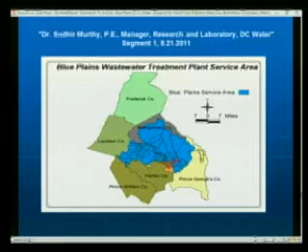Yeah, and I was going to say, this is some of the largest counties in both Virginia and Maryland, so these are a huge population base, and of course it's not as big as maybe some of the mega cities that we'd have overseas, but as far as the area that you're serving, it really is a huge area, and this gives us another idea, Sudhir, of just how expansive this entire area is.

Yeah. So, one of the longer sewer pipes is, I think, over 50 miles long. So that gives you a sense of how long it takes for that water to get to the Blue Plains plant. Well, also, I think there's like 1,800 miles or something like that of piping that goes into this whole thing. I mean, these numbers are just astronomical. Yeah. What are we looking at here?

But one of the things, when I was out on my tour with you, you were talking about how one of the features of being the most advanced plant on the globe is that you have to protect both the rivers, the Chesapeake Bay, and the Atlantic Ocean, which is a huge task and very expensive. Tell us about the separation that you're doing and why it's so complex in your factory.

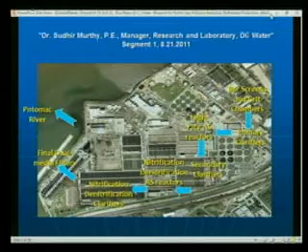Yeah, and I understand that as far as other plants, I call them factories around the globe, really is that you're either taking out the nitrogen, you're taking out the phosphorus, and/or a combination with the carbon. But this is really the only plant as far as the world is concerned where you're taking out all three simultaneously. To very low levels. At very low levels as it's going into the water.

And of course, you have this tributary. And many of us kind of forget, yes, it's going into the Potomac, it goes into Chesapeake Bay, we need to improve those. But we don't realize the impact that we're having from this region on the entire globe, because once it gets into the Atlantic Ocean, who knows, through the tides and through the water flows where all that water is actually going to end up. That's right. And it's everywhere out there.

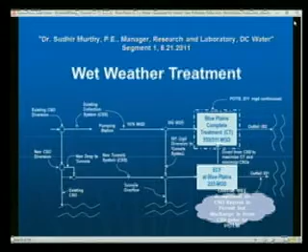So looking at this treatment here, what are some of the processes that we're looking at, in a very simplified fashion? So the slide that you see out there is really what we're trying to do coming up now. We have what we call this wet weather treatment plan, where we hope to bring all these combined sewer flows to the Blue Plains plant rather than it going out into the Anacostia River or the Potomac River without being treated. And so we are designing these projects that will build tunnels underneath Washington, D.C., and then bring that flow to Blue Plains plant where it will receive what we call enhanced treatment.

Now, understand this part of this is about $2.3 billion. Now, that's with a B. That's a lot of money. And everything that you're doing in this whole, and I'm going to go back to this slide here, what we're talking about is really almost $4 billion worth of investment. As I understand, this plant's now worth somewhere between $2 and $3 billion itself as it sits. So we're actually having about a $7 billion facility. Infrastructure. That's a huge investment by the public. And this is where we're going right now.

Now, I understand it's about 10 million U.S. in savings as far as energy that you're not going to have to be bringing in from the utilities, so you're becoming more self-sufficient. And also that the overall cost savings is about $28 million. Is that in a month or is that in a year? The total savings as far as everything. So what we expect is... we have only a few seconds. We have an energy program, and we expect to have several million dollars of savings per year just from energy.

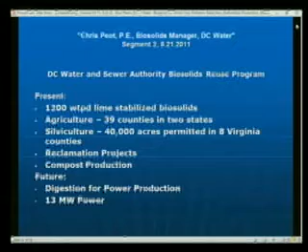So what we're doing actually, Chris, in all this, we're looking at, again, this nitrogen, phosphorus, and carbon that we're actually extracting out of all this because those are natural elements. Then we're putting it out on the soil. And the whole thing is that we're not just trying to stop what's happening at this time. We're actually trying to improve the environment. So that's air, water, and land. All 3 of those we're trying to improve through this very expensive process.

It is. I actually refer to Blue Plains as a nutrient recovery facility. We're recovering water, of course, nutrients, carbon, and energy. And all of that right now is going out to the fields, the farms, and we don't extract much value from that. We're glad that the farmers are using it. They are avoiding the use of manufactured fertilizer, which takes a lot of energy to make, of course. And also we're importing the petrochemical inputs in order to be able to produce this chemical fertilizer.

So being able to take all this human waste and then put this out onto the farms in a sterilized format, so we're not putting pathogens into the soil, is a very good thing for the environment and for humankind in general. It is, and our future holds even more technological advances. We've actually broken ground on a project to build digesters with a very innovative pre-digestion process to convert half of the organic matter that's in the biosolids to methane. And then we're going to burn it in a very clean burning turbine to create power.

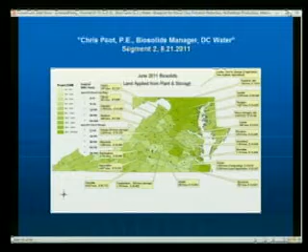Sure. This is our current program. This is, I think, June of 2011. This is all the different counties that we went to with the material for the month of June. It's a very diverse program. A lot of the counties have slightly different regulations and

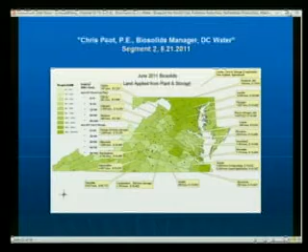ordinances. But the graphic there shows, I don't know if you can read it on the screen, you won't be able to, but it shows the tonnage that goes and the value that the farmers are extracting from it. The farmers routinely testify that it's worth about $300 an acre to them because of the value of the nutrients and the carbon that they're getting.

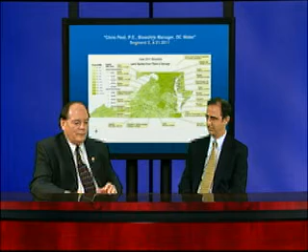Okay, so taking the biosolids, we're extracting this from a huge area, bringing it in, processing it, putting it out into the land, which is going into many useful products. Also, it goes not only to food production and meat production, but also into the ornamentals, which is really good as far as being a carbon sink and extracting the carbon from the

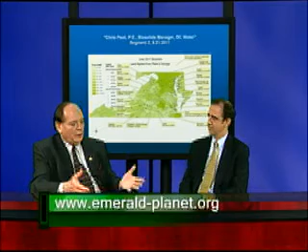air. So really, this is a very sophisticated process, where you're taking the phosphorus, the nitrogen, the carbon out of the solids, and not only putting it on the land to provide the nutrients, but you're actually providing an enhanced environment extracted from the air itself.

It is, and there's all this anecdotal evidence that we get from farmers. The farmers always say that the crops that they have resist drought. And we always thought it was because the organic matter was holding more water, but if you do the math, it's not holding enough water to make that big a difference. And we've done a lot of research at Virginia Tech showing that... And that's the land-grant university for Virginia. Thank you.

Showing that the microbes that are in the biosolids that come from the treatment plant, that actually come from our guts, ultimately, are extracting these essential plant hormones that plants need to get through stressful conditions. So it's really great for the farmers.

So what it's doing is really strengthening the root system, and this is one of the things that the Bill and Melinda Gates Foundation is saying: the greatest threat to humankind as far as food security, water, and everything else is the poor quality of the soil, and the quality of the soil has continued to decline as we overproduce food materials and fiber. And so this is one way we're giving back in a very significant way to the soil itself.

It really is. It's difficult to find a farm that has an optimal level of carbon in it because farming is very hard on the soil. So the farmers are always looking for more sources of carbon to put back into the soil. Now, looking at this, we'll save that for just a few minutes. Tell us what we're looking at here as far as this distribution out to the farms.

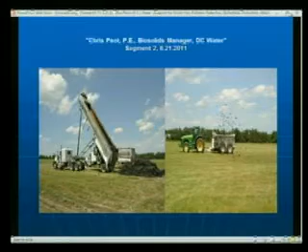We have to adhere to slightly more stringent buffer restrictions than farmers that use inorganic fertilizer. It's just an extra measure to help protect the waterways in the Chesapeake Bay. And make sure, again, we don't have the nitrogen, the carbon, the phosphorus running off.

airplanes. And they cut into some hills and they spread out the sediment, and they couldn't get any grass to grow. And it turns out that they cut into a naturally occurring but extremely acidic vein of pyrite, which is very sulfurous, and they spread it out all over the whole site.

No fault of theirs, really. And they had pHs as low as 2, 2.5. And we said, hey, we've got lime-stabilized biosolids at pH of 12. We can come in and restore this. And now they have thigh-high grass, and they're worried about mowing and things like that. It was a really nice solution. So they go from one extreme to the other.

Yes. But talk about this lime being added. I know this is part of the process as far as processing these biosolids that's actually coming out of the Blue Plains plant. Tell us why you're adding the lime and why the farmers like that so much. Sure. A lot of times farmers will add lime just to adjust the pH of their soils. And we add it as a way to limit the pathogens. It's one of the EPA-approved methods to limit the pathogens. We raise the pH to a level that the pathogens don't like, and it's okay to bring it out into the field at that pH because the farmers like to adjust the soil pH anyway.

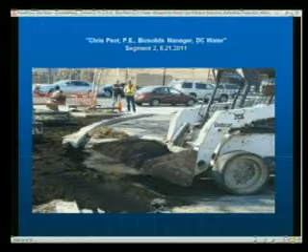Looking at this slide here, this is something as far as a restoration project. What's going on here? Sure. We are producing a compost product also with our biosolids. We have such a huge program that we can slice a little bit off and do some innovative things. We have 50 tons a day going to a compost facility in Virginia. And we're bringing a lot of it back up into the city for tree planting, low-impact design, runoff limitations, things like that.

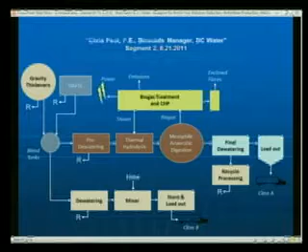Now, looking at this is getting really to the essence of the processing and also how you're actually trying to have a very positive impact on the environment. We see the lime here, and we see all the filtration that's going on. How would you describe this to our viewers so that in a very simple way we're talking about how we're reducing the carbon footprint to the earth at the same time providing real value to the farmers and to the citizens? Sure. That is the schematic of the new energy system that we just broke ground on. The line on the bottom is what we're currently doing, and the line in the middle and up above is what we're doing in the future.

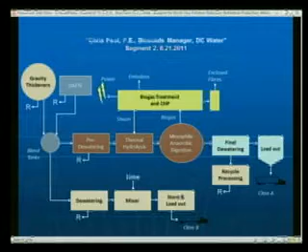The digestion process, it's an anaerobic process. Anaerobic microbes respire methane. We're aerobic entities. We respire CO2. So they produce methane. We collect it and burn it in a clean-burning turbine and recover heat off of it to go back into the system. We have a very innovative pre-processing system, it's called thermal hydrolysis. It allows us to digest the biosolids in about half the tanks that we would normally. And out of the tanks, we get methane and a very high-quality Class A biosolids that we'll be able to make a soil product with and recycle in the city as well.

So we're enhancing what we're doing, but also I understand it's about $10 million worth of offsets that you'll be able to produce out of this plant? Yes. The energy production is about 13 megawatts of power. It takes about 3 to run the system, so it's a net positive of 10 that we will get out of it. And that 10 megawatts is worth about $11 million a year. There are other savings associated with the project. And that runs about 8,000 homes, I understand. Yep. 13 megawatts is enough to run about 8,000 homes.

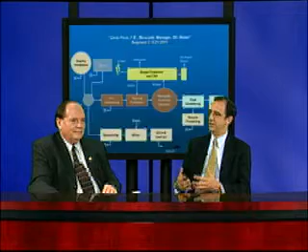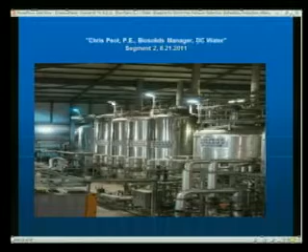We're going to use it all on site because we are a large user of electricity, the biggest user of power in the district. And because of that, we also have the largest carbon footprint. And this project alone is going to cut our carbon footprint by a third, by 50,000 metric tons of CO2. That's just absolutely incredible. And this is really what we're getting to. This is the essence of everything.

We have about 30 seconds left. Chris, what would you like to share with our domestic and international audience, their takeaway from everything they've seen about both extraction, putting it out into the agricultural community, but also producing their own fuel? Well, sure. I live this every day, and I enjoy tremendously what I do, but I want people to understand that this is a resource that all cities should be using and taking advantage of. You cut your carbon footprint. You can make a product to use to grow trees, reduce the temperature of the city, reduce runoff. Just so many benefits, and thank you for being with us as we create the Emerald Planet.

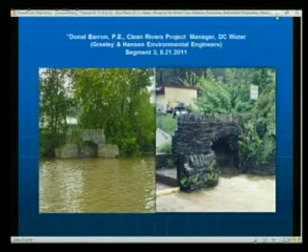So we started back in 1998. We did planning, did a long-term control plan to come up with a plan. There's various technologies. One is storage. You can store the combined sewer overflow and then release it as the rain abates and get it treated. You can separate it, or you can do low-impact development.

There's several different things. You'll find that the larger cities like D.C. or New York or Philadelphia, a large part of their solution will generally be storage. And storage in this case means deep underground storage. In our case, it means 13 miles of 23-foot diameter tunnel. And I'm going to say that's very expensive, and we're looking at this map here.

Just kind of walk us through this, Donal, what we're looking at here, the difference between the yellow and the red lines, and what is the economic impact on the city itself, but also the ratepayers with this type of system? The project is projected to cost about $2.5 billion. And that's with a B, billion dollars. With a B, yes. And over a period of 20 years, we're about 6 years into it.

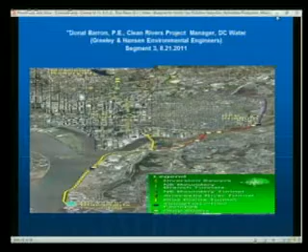What you're looking at is the plan for the Anacostia River. It's got 13 miles of 23-foot diameter tunnel, and it ends down at the Blue Plains Tunnel. There are similar tunnels planned for the Potomac and Rock Creek, but our hope is that on those we have an initiative for green infrastructure. And I think this is really the way the world's going in the future, because it's a way to take something we're looking at as waste, the stormwater going in with the combined waste from the homes and the farms and the commercial buildings, and actually use it as a resource and cut down on the investment.

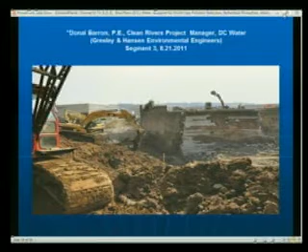So this looks like something very major is going on here. This is the first piece of construction. This was preparing a site at Blue Plains to sink the shaft to begin the tunnel. What you see there is a little different from what you see there now. It's actually flat and even. But there were some digesters there. We had to have a good site to sink down the shaft so we could start it. And I think this is actually where the plant started.

If we think back on the maps we had back to 1938, where you had those anaerobic digesters. And so what we're doing is cleaning that old technology out as we're putting in almost $4 billion worth of all types of new technologies. And so this is really a massive investment, but it's also a massive construction project. It is a massive construction project.

As I said, we're only in the early stages of the actual physical construction. Over the last 6 years, we've been doing planning and design. We're actually into the first tunnel contract now. It's a design-build contract, so we're doing the design and getting ready to do the construction. Well, I know there's over 1,000 employees as far as DC Water is concerned. Of course, that's both sides, the water and the sanitation part. But do you have any idea about the number of workers involved in the construction in the various projects on the site?

There will be several hundred workers. The tunneling itself is more equipment intensive than manual labor, but there will be a lot of surface construction. There'll be a lot of jobs from that. Plus, we're trying to do more low-impact development, green infrastructure, and that would generate a lot of environmental jobs.

And this is what we're talking about here. This is really the wave of the future. If you look at all the square footage on the buildings around Washington, D.C., actually any city around the globe, whether you're in Rio de Janeiro, you're in Beijing, Shanghai, London, Paris, wherever it may be, we have these huge surface areas on the roofs, and we need to be thinking about how we can turn these into green roofs.

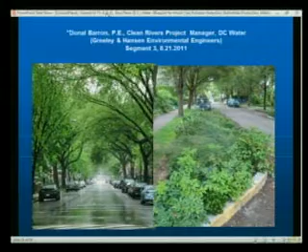Again, that's other types of green infrastructure. The green roofs is one type. What we're looking at here is a curb bump out, where you have inlet. The stormwater off the street is actually going into that green area. And the one on the left is just your plain old-fashioned trees. You know, they retain water as it falls. Because what you want to do is delay it in many cases. If you can attenuate it or delay it and allow it some time before it gets into the system, it comes into the system after the rainfall, so it helps tremendously.

Well, we've had the leaders from the Anacostia River on here, and we saw some of the destruction just by the actual volume of the water that's going into these tributaries, and it's an amazing amount of land that's actually being destroyed and undermining the infrastructure within many of these areas. So having these rain gardens and also having the number of trees that you have in cities, and of course this is something that people are really looking at, is how do we actually plant more of these.

But this is really what we're looking at here. This buffer zone is very important. It looks very lovely, but actually this is serving a very profound environmental use as we're looking at cleaning up the river. Yes, and what we want to do is have more green area, basically, especially in the combined sewer area. I mean, there's benefits in the separated area too, because it retains stormwater. But the more green area you can have, the better.

Unfortunately, with the Anacostia, we were under much tighter consent decree deadlines, and we weren't able to. We've done some low-impact development, but we needed the certainty to meet the consent decree. There's nothing more certain than an engineered solution like a storage tunnel. Low-impact development needs a little bit more testing. I mean, it needs monitoring, you know, before you do it and then after you do it. So we need to do some demonstration projects to get a better idea of what it can do for us.

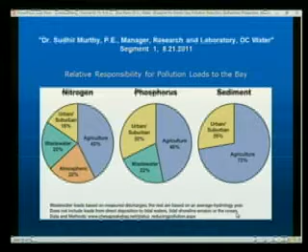Well, and this is the one thing that we need to realize as we have this chart behind us, and this is something, Sudhir, coming out of India yourself, is that you're looking at China, India, Brazil, Russia, South Africa, many of these nations, the populations expanded very rapidly, but the income levels are expanding at a very rapid rate. So the food intake they have to sustain is at a much more sophisticated level, much more complex proteins, carbohydrates, and the solids are being discharged into that.

So it's not just our grandfather's old wastewater treatment facility. We not only need to, again, emphasize maintaining, we need to actually get ahead of what's going on here, but it needs to be done globally. So if we're talking about $4 billion put into one municipal system, just think about the trillions that need to be invested around the globe to handle this. And this is the challenge: the nitrogen, the phosphorus, and the carbon is the same challenge we have everywhere in the entire globe.

That's exactly right. So we may call it a challenge, but we can also call it an opportunity, right? I like your attitude. This is the opportunity, okay? And the reason it's an opportunity is, I think today we have so many new and interesting ways of doing exactly what we used to do in the past, but we can do it at lower costs, with less energy and with less chemicals. And if we can do all of that, everyone benefits. And so I think we are going towards a new era of wastewater treatment and removal of nutrients, and I think everyone's going to benefit.

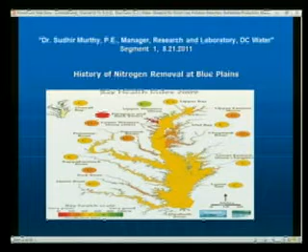In an earlier chart that I showed, the pie charts, much of the pollution right now is coming from agriculture and stormwater, and so the wastewater treatment plants have done their job. They have reduced the nutrients. What needs to be done next is really a bigger challenge of reducing non-point source pollution, treating agriculture runoff, or preventing it from getting into the rivers in the first place, and how we actually manage stormwater.

Now, looking at these 4 photographs here, this is something about the removal, and this is what was going on in the tour I was taking with you. Looking at this triangle, what is the interplay here amongst all of this? Yeah. So, really, what this chart shows is wastewater treatment. It's got chemistry. The treatment involves a lot of chemistry, but actually, we use bacteria. We use these good bacteria that actually help us with this removal of nitrogen and phosphorus.

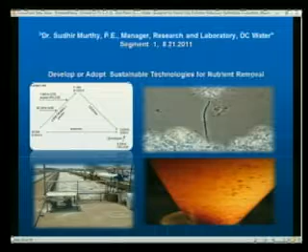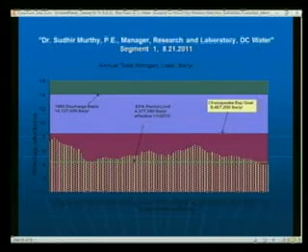And there's been some really new innovations happening. We've been developing, or actually encouraging, new bacteria that can do this work in a more cost-effective way. Well, and the whole thing, too, Sudhir, is not to have all these huge, expensive mechanical systems, but allow something like the anammox bacteria, our friends, and let them go to work. Exactly, exactly.

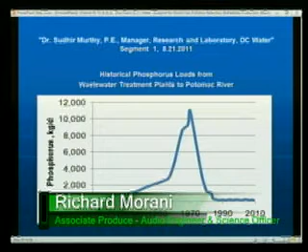Now, looking at this, we have 2 charts here. Let's go over these. What are we looking at? This chart really shows the removal of phosphorus from the Potomac River. So if you look at that peak out there, that was the amount of phosphorus being discharged from wastewater treatment plants to the Potomac River in the 70s and the early 80s. And then we started removing phosphorus. And this phosphorus is really what was contributing to harmful algal growth in the Potomac River. And in just 5 or 6 years, we almost completely eliminated it.

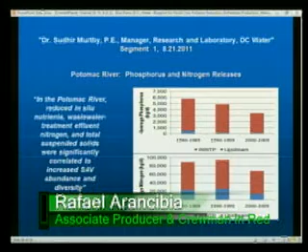Well, we're going to leave this slide up here. We only have about 15 seconds left, Sudhir. What would you like to share with our domestic and international guests about what they need to think about as far as their impact on clean water? Well, got to be quick. We have to remove carbon, nitrogen, and phosphorus in many locations all over the world. We can do it in a very sustainable manner, and we can help the water and sanitation of the world. As we do that, we're creating the Emerald Planet.